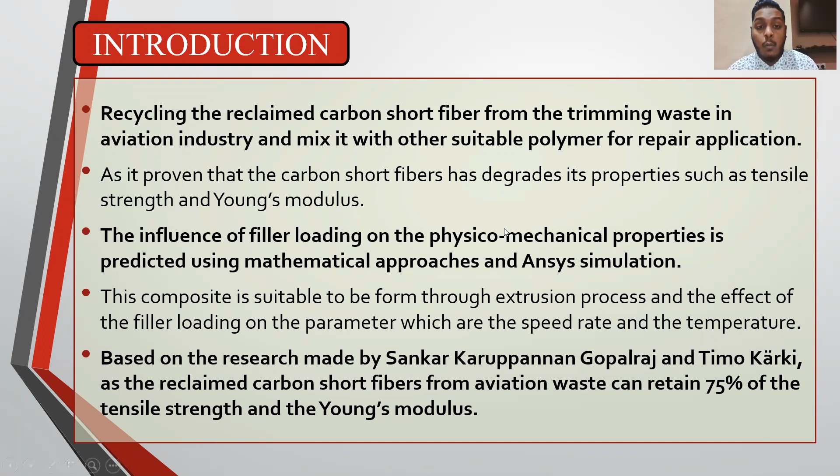For the objectives of my project, the first one is to predict the influence of filler loading on the physico-mechanical properties using a mathematical approach. The second one is to evaluate the effect of extrusion parameters such as the temperature and the speed rate on the filler loading.

The scope of my project: for the material, we use ABS and reclaimed carbon short fiber. The physical property is the density of the composite, and the mechanical properties are the tensile strength and the Young modulus. The extrusion parameters are the speed rate and temperature, and the method used is a mathematical approach and ANSYS simulation.

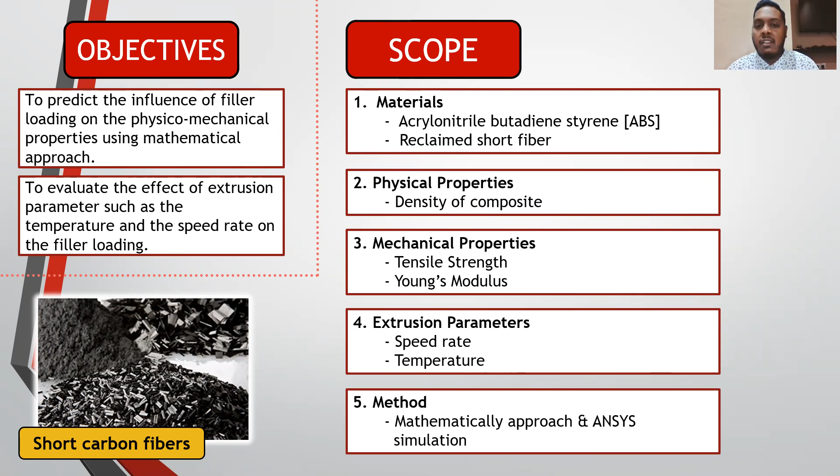For the problem statement, in the aviation industry most aerospace parts are made of carbon fibers because they have high strength and low density. However, the waste from the trimming process has a low tensile strength. Hence, a suitable matrix is selected to prevent high viscosity of the melt, which can reduce the flow rate and increase the pressure of the extruder.

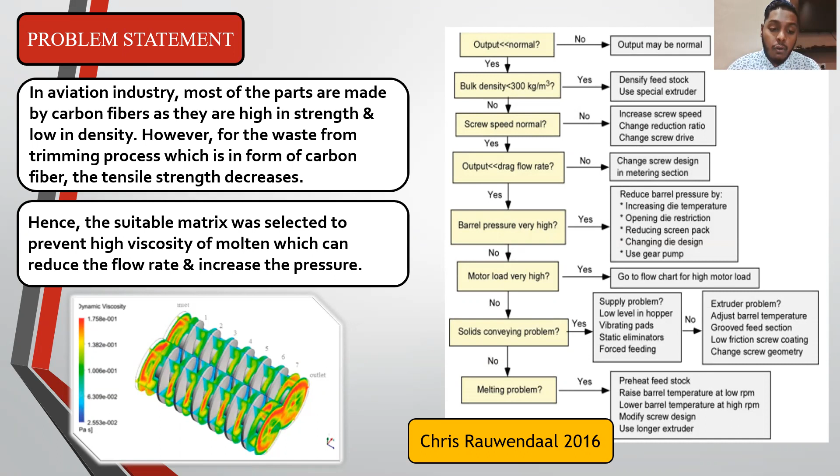From the research by Chris Rauwendaal in 2016, we can see that when the barrel pressure is high, we need to increase the temperature, and this will cause the composition to form improperly. The figure below shows normal, good mixing of the composite in a twin screw. Because the red region in the figure is low, it means the pressure is good.

For the literature review, we chose ABS because, compared to polypropylene, the polypropylene and carbon fiber composition has high processability and recyclability, but it is low in strength. To improve the strength, we need to add some nanofillers, which can increase the pressure, and the flow rate will become low. For ABS, the tensile strength is slightly lower than polypropylene, but it has good tensile strength for a repair application.

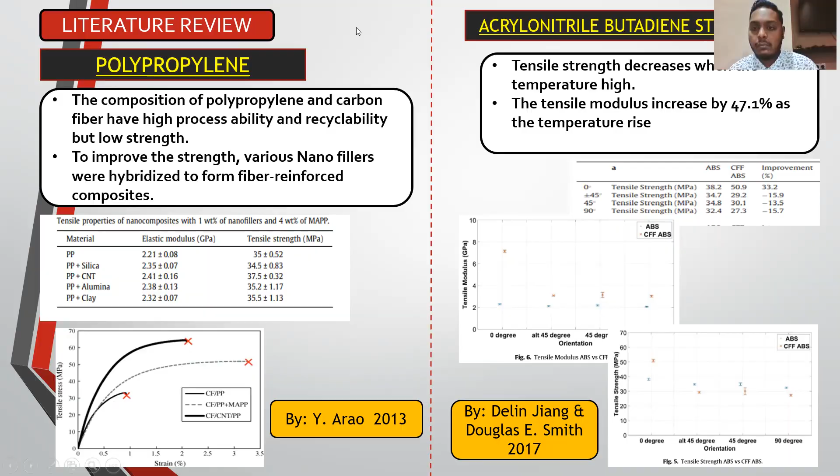For the literature review on extrusion parameters, when the temperature is high, the flow rate is also high and the viscosity drops. This means it has a proper mixture of the composition. When the temperature is high, the pressure is also low, and this will produce a good composite. When the speed of the screw increases, the flow rate also increases. This means the pressure is a bit low.

From the literature review, the proper temperature and speed rate are obtained, and the tensile strength and Young modulus values are used for the mathematical approach and the ANSYS simulation in chapter 4 for the results and discussion.

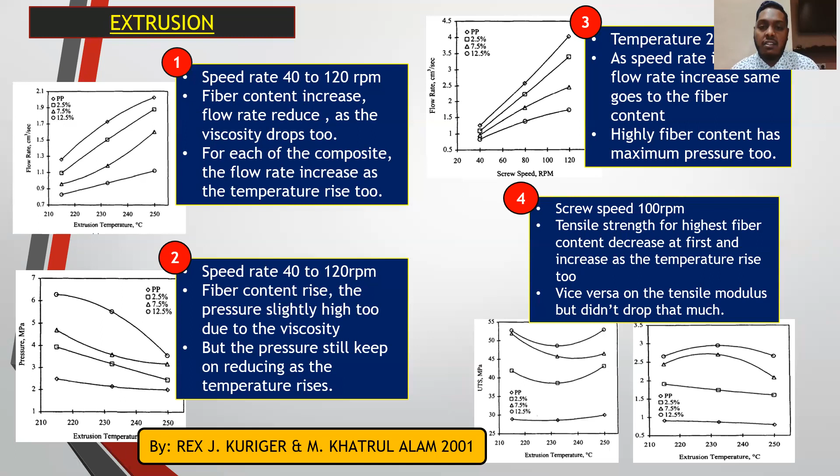For the methodology of my project, the first one is the mathematical approach. We use the tensile strength formula as shown in the slide and also the Young modulus formula. We collect data on the volume fraction of the composition, the tensile strength and the Young modulus, and these tensile strength and Young modulus values are used for the calculation.

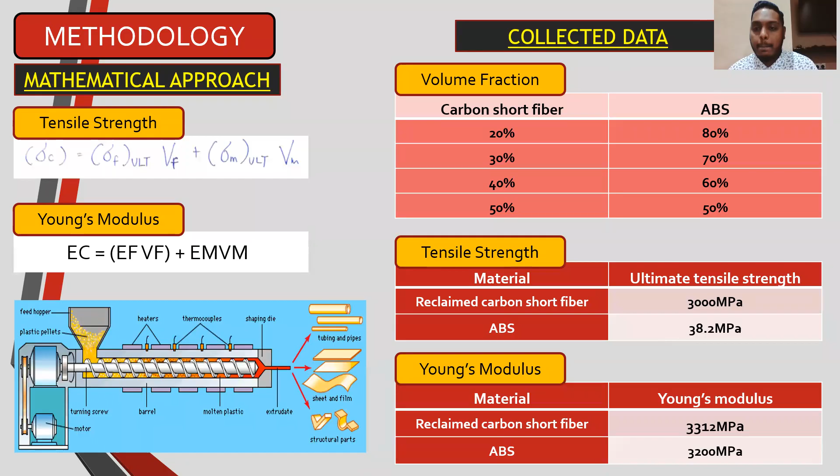For the ANSYS simulation, a 3D CAD model is created in a dog bone shape, ASTM D638, and after creating it, we mesh it with a 0.7% mesh setting. A fixed support is applied on one end of the dog bone, and the force is applied on the other end, where the force is a pulling force.

For the engineering data, we collect data from the literature and take the average of the Young modulus and the tensile strength to be applied to the simulation. The suitable Young modulus value is 10,400 MPa, and the tensile strength is 150 megapascal.

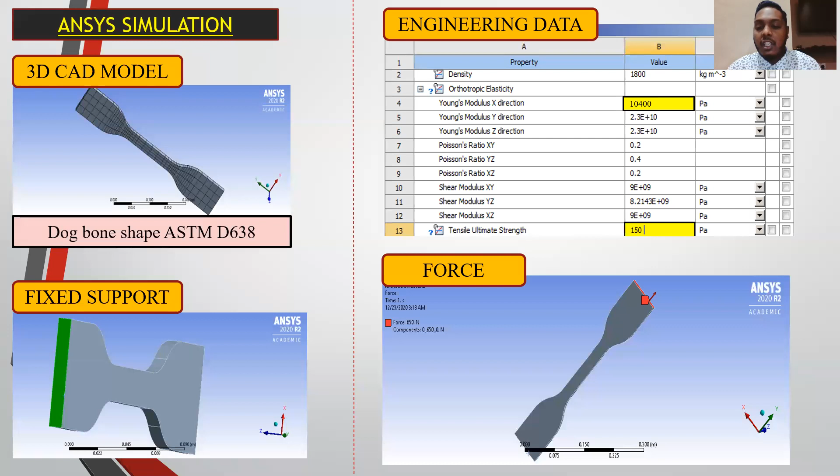For the results and discussion of the mathematical approach, when the carbon fiber content in the composition is 50%, the tensile strength is high, at 1519 megapascal. For the Young modulus, the higher the carbon fiber content, the higher the Young modulus. The stress is also calculated, where the stress is higher when the applied force is higher, and this stress will be compared to the ANSYS simulation stress result.

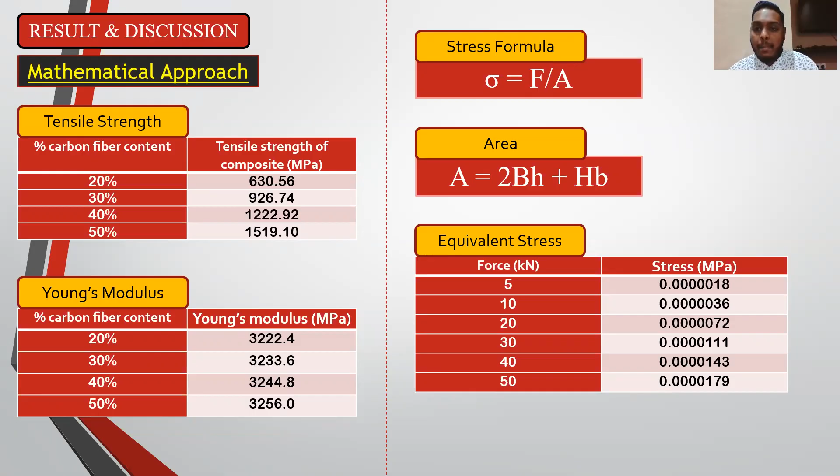For the equivalent stress, we set a few forces, starting from 5 kilonewton to 50 kilonewton. When the force is higher, the stress is also higher. The same goes for the equivalent elastic strain. We calculated the average of the maximum equivalent stress and strain, plotted a stress and strain curve, and found that they are directly proportional.

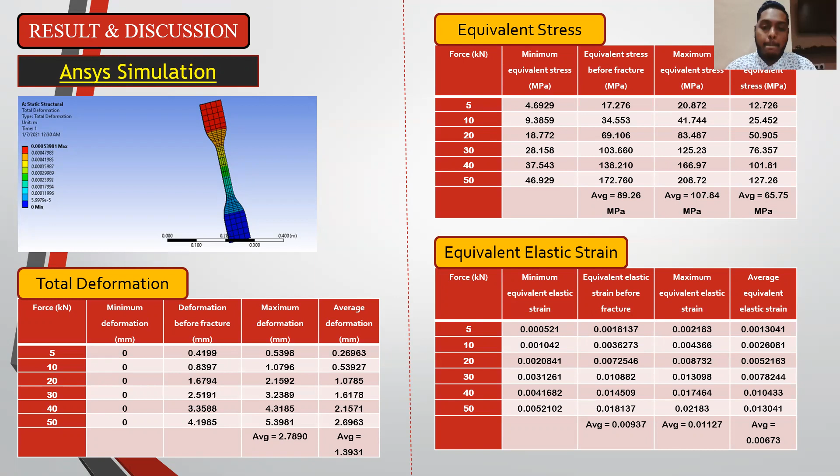For the conclusion of my project, the reclaimed carbon short fiber has a great opportunity to create new products, as it is suitable for repair application. Based on the mathematical approach, as the volume fraction increases, the physico-mechanical properties increase too. Based on the ANSYS simulation result, the pattern of the result is similar to the mathematical approach, even though the values differ by a big margin.

For improvement of the study, it is recommended to conduct a lab experiment where the extrusion parameters can directly influence the result of the composite properties.